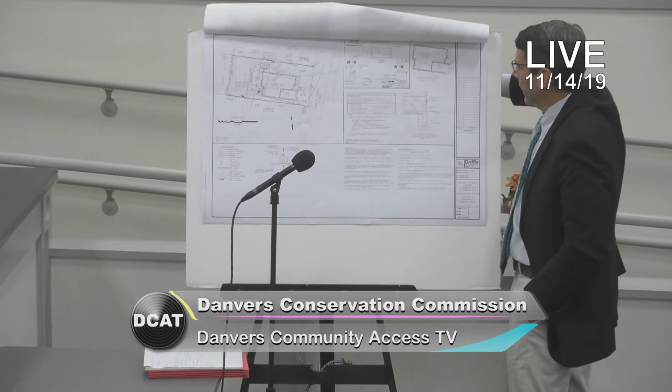So here's our plan, and I know this is kind of hard to see, but our site plan's over here and a couple of details that we'll talk about. So I just took that little site plan there and I blew it up to make it easier for us. That's good. Thank you.

So in the beige or the peach color here is the footprint of the existing house with a deck on the back, a wheelchair ramp running up the side, and then you can see there's an existing driveway in peach, and a walkway coming from the street up to the wheelchair ramp here. And there's another strip of paving along here that, if you line your car up right, you can put your wheels on the sidewalk and a little piece of driveway there, so you can get some more cars over here as well.

But what we're proposing to do is we're proposing to build a house that's just a little bit bigger in footprint. It'll be a two-story house instead of a one-story house, so it'll have more gross square footage, but the size impact on the property isn't that great. I think we're about 150 or 200 square feet larger footprint.

The house is going to have a built-in garage, so it would have a one-car garage here, right off the street level, and a little bit of driveway space in front of it as well. But then we'll have lawn sort of over here. We've got another little driveway space over here to park an additional car when we have visitors or guests. We'll obviously have parking on the street.

We're going to push the house a little further away from the lot line, so it looks like we're about half a foot off the lot line. We're going to be at 5 feet to the foundation here, and about 4 feet to the eave. And over on this side, we're going to be, looks like about 15 feet off the property line approximately on this side.

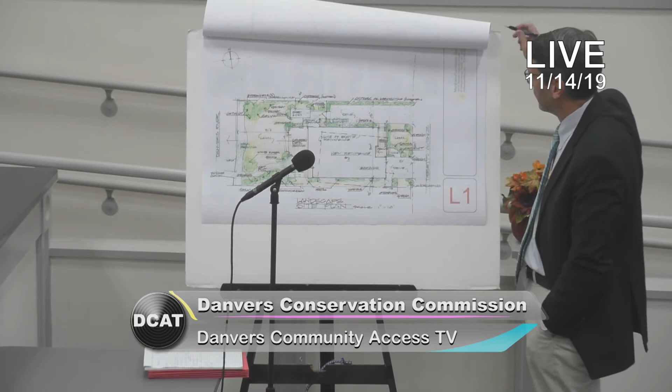They're going to obviously take what's an eyesore in the neighborhood and make it a significant improvement. So there's a lot to like on this particular project. I also want to point out some landscaping features here. Marsh Wind Landscape Design of Rowley, working with David Jacobs, the architect, came up with the plan. But you can see a lot of perennials and shrubs on the property here. There is a proposal to remove 3 trees as part of the project here. You might recall that one of our photographs shows a very dead tree there in the back at the house,

so that's... Can you turn that thing a little more, please? Sorry, yeah. Can you do that? Yeah. Thank you.

So there's the dead tree. If you look on the site plan... Why are you calling that a dead tree? You look at those trees and you look at that tree. Oh, yeah. Well, the dead limbs still fall off of it. When was the picture taken? This summer. Summertime? The others have green leaves. Oh, okay. All right. When did we meet out there, Michael? September, August? I know, if you looked at it today, you'd say, "What's the big deal?" They all look like dry trees, no leaves.

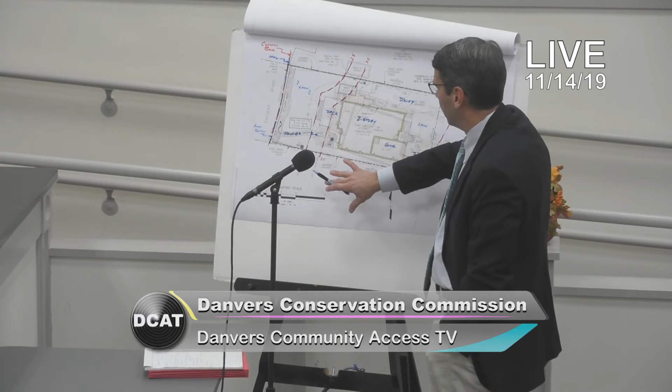Obviously, this is that particular tree. There's another tree on the sideline of the property that is also dropping limbs on both the Hubbards' property and the Marchand's property here, 13 Tivitz. Both property owners would like this tree removed because it has just gotten to be too big. It's probably near the end of its useful life. And while the building is down, we have an opportunity to get the tree out and replace it with some more appropriate landscaping. Same thing over here, we've got a tree that Mr. LeBlanc and the Hubbards would like to remove. And it's really the time to get rid of these trees.

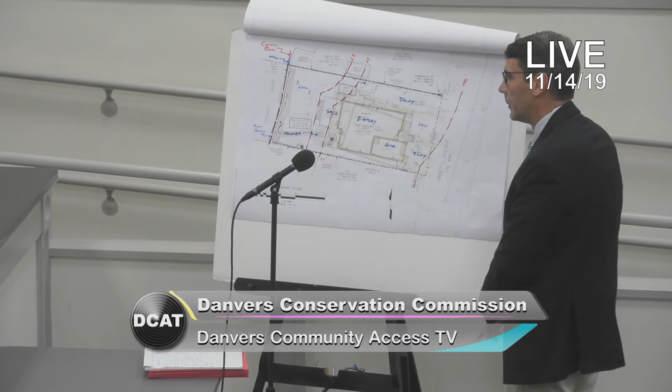Well, just to interject for a minute. Go ahead, Dave, you done? On the picture, can I see the backyard again? Of course. So it's just lawn back there, right? That's correct. And you're proposing, besides the lawn, to put in a walkway? We're going to put a walkway from the new house out along the seawall here. Along there as well? Along the seawall, right, because we don't want splash over killing the grass. But the grass is there now. Right, and obviously it's susceptible to wave action and spray, and as sea levels rise, this condition's only gonna get worse, so we're trying to protect the edge of the property.

What is the condition that's worsening? Right now, the wall is failing, so there's dirt going out into the river, there's been some settlement there. But you're gonna address that with a repair to the wall. Correct. But not in the scope of this project. We're gonna come back with another filing for the wall and a float and a small pier. And do they live in the house now? No, we live in Beverly, and the house is unoccupied. Not habitable? No? So you're gonna disturb that area along the wall twice then?

Well, assuming that we're gonna come back pretty soon with our notice of intent application for the pier, and it's gonna take 6 or 9 months to do this work, I think we'd probably get it all done in the same project. But you're gonna come back with a separate filing? That's correct. But for us, it's two separate projects.

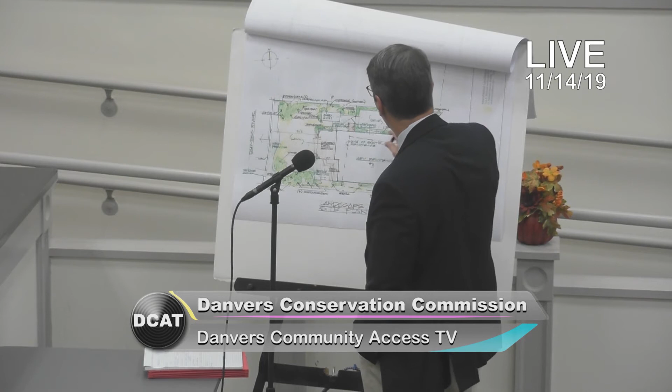It's pervious pavers, right, but I think we're trying to protect the edge of the lawn from salt spray and want to have good growth in that area. But we are proposing, as you point out, shrubs and perennials all along the property here. So we're gonna add significantly to the amount of shrubs and perennials at the property.

Are you gonna add any trees to replace the dead ones? We don't really have any proposals for trees. We do have proposals for some evergreen, sort of large shrubs, arborvitae or cypress up here. The plant palette is here. I saw that. Nothing really tall, but stuff that will flower at different times of the year and provide color throughout the season. And of course, some evergreen, particularly the Colorado spruces and evergreen shrubs as well.

How susceptible will this be to flooding as time goes on and we anticipate sea levels rising? The house will comply with the current flood requirements, which the current house doesn't. So we're going to elevate the first floor; the first floor elevation will be 11.5, and the flood zone here is 10. 11 and a half above mean high tide?

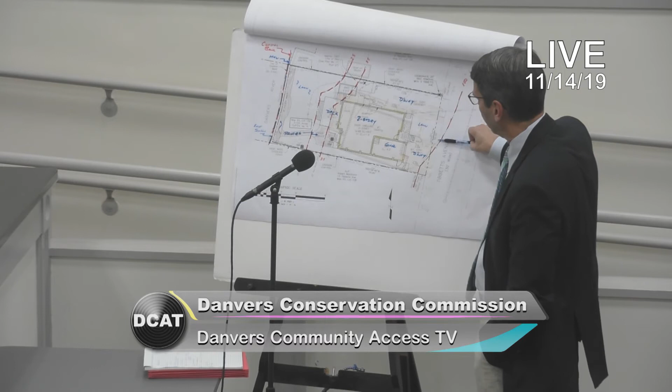So is there gonna be a foundation? There will be a foundation, there'll be a crawl space, and we'll have flood vents to allow water to come and go, to pass through. And what about the garage? Same thing, flood vents here and here. So in the event of a flood, we'd be at elevation 10, the 100-year flood elevation, which is about 1 foot above the street elevation here. There's an elevation 9 in this area here, so the water would be 1 foot deep in this particular area.

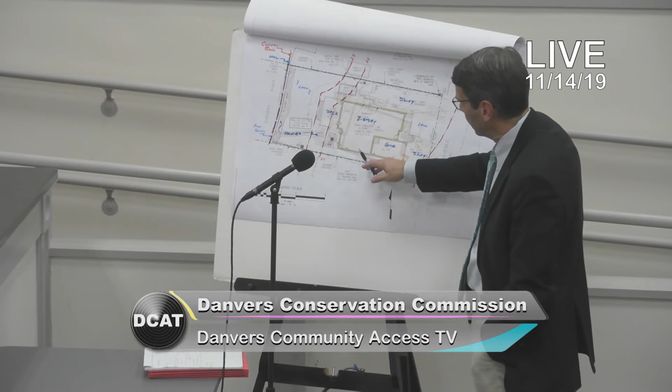But the first floor would be elevated above that, and the crawl space would have water going into it through the flood vents. Complies with flood. And there's no basement, obviously? No basement, a crawl space. Okay. So you have 3 feet plus or minus to stuff a kayak underneath your house or something like that. What is it now? There's just a crawl space underneath it, but there's no flood vents or anything like that.

Well, all in all, I think it's a good project. I'm just uneasy with the pavers, building a patio or whatever you wanna call it out to the wall, and then having to redo that when you come back to rebuild the wall and the pier. Well, I think it would be more likely that we would hold off on doing that portion of it. Yeah, that's what we're thinking. Take it off the plan. Take it off.

Okay. I also just have a little question about the deck. It says the deck's pervious, but it also says it's covered, so what's the cover? This area of the deck is covered, so there'll be a roof over it, and then it'll be open underneath. Like underneath the deck is open? Yes, right, so air can move around. So where will the runoff from the roof go? We would put it onto the lawn. Onto the lawn, yeah. Does staff have any concerns with this?

I just have 2 points. One, noting the ZBA, is there any chance that this plan could change based on the ZBA's decision next week? I can't predict what the ZBA is gonna do. I think we have a good project, but you're right, I don't know. What's the relief you're looking for at the ZBA? Does it have to do with side lot lines? Setbacks. Yeah, because you're in an R2, so what's the side lot?

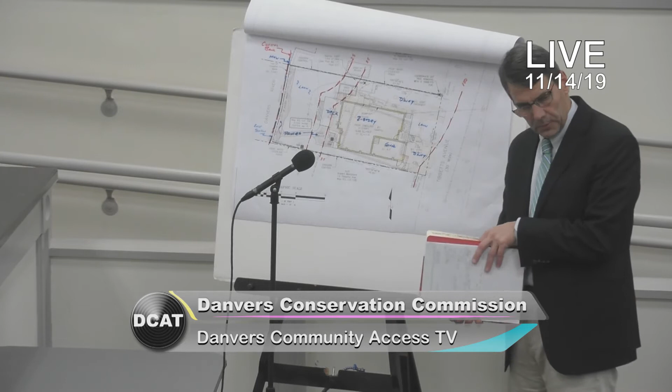Side lot requirements in the R2? 15. 15, and how close are you? We're gonna be about 5 here. You're gonna be 5? Right now we're at 0.5, so it's a finding. Is it technically a finding? They're looking for a variance, right? Right.

But we're going from a half a foot to 5 feet. Right, so you're becoming less non-conforming, and that's good. That's what I'm saying, that's a finding, I think. We're pushing it back from the street. Right now, I think we're at 13 feet from the street, we're gonna go back to 16. What's the front setback? 20? I think it's a 20 or 22. So we're gonna be 15 feet off of the street line and 20 feet off of the pavement itself.

How many square feet is the house? So the footprint, 2,200? Living space, so it's 2 floors. 1,100 square foot footprint? Yeah, approximately. Just to get the numbers right, the proposed front yard setback on Tivitz is 16 feet, which is greater than the existing front yard setback of 13.3. The proposed side yard setback will be approximately 5 feet to the foundation, which is greater than the existing side yard setback of 0.4 feet to the road. So it's an improvement. So you're going from a half a foot to 5 feet?

Yeah. So that's not our decision to make. Interesting. Do we need to wait for the zoning board of appeals before we make a decision? Only if it changes, then they'll have to come back and reconcile the plans. Well, sometimes we say, go get your other relief and come back here, but I think it's situational. We're keeping this open to the next meeting, so you get your relief. That way, the two plans will be the same.

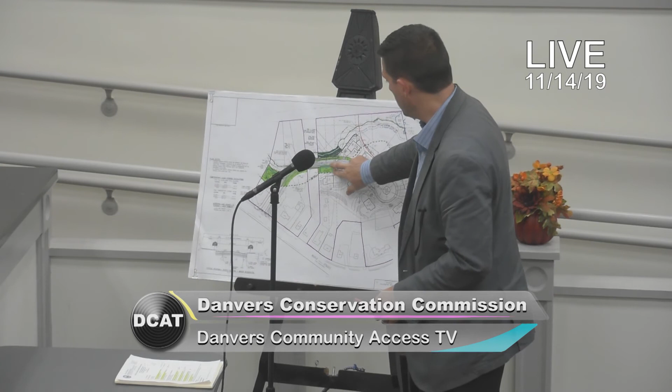Evening, Mr. Chair, Scott Cameron with Moore Cameron Group, here on behalf of Beaver Brook Woods LLC. We are requesting a continuance for the two lots, 6 and 7. We are working with planning staff and the planning board on the existing right-of-way that passes through this area, and we have not been able to reach a conclusion on that yet. Just timing, quorum, just a lot going on. So we would really like to have that resolved before we proceed forward with these two applications.

Mike, question? Yes. So with regards to, what have we approved actually so far here? The roadway. Yeah, but now the roadway could change? No, the roadway's not going to change. What's going to change is whether there's an easement over here, or whether the town wants to relocate it here. But it's not gonna affect the roadway? Roadway does not change. All right, that was my question.

Okay, so the applicant has requested that we continue, is that correct? Yes. Do you have a date for that, Scott? Do you want to continue to the 12th or next? Yeah, the next meeting, which is December 12th. Okay, so that's just clarified. Right. Okay, Mike, or Chelsea, you just want to make a motion?

Yeah, I'll make a motion to continue 305R Maple Street, Lot 6, DEP file number 14-1332, and 303 to 309, 305R, 313R Maple Street, Lot 7, DEP file number 14-1333, to our next meeting on December 12th. Motion's been made, is there a second? I'll second. All in favor?

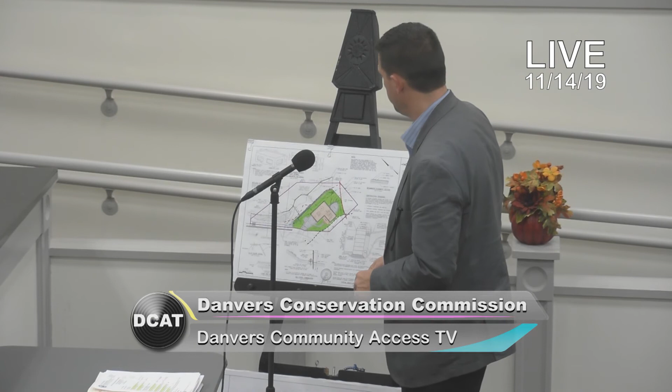How long is the retaining wall? Just show me that again. On what's that, the north? For the roadway? No, the one in the back of the property. You said the short one. Right. It's right on the 35-foot line? It's outside of the no disturb. So it's outside the 25-foot, it's just inside the 35, so we didn't go into that no disturb.

We're using that as the limit of work on the 25. What'd you say, Georgia? I'm just wondering how far it is from the 25. Is it 25.2? I don't have an exact measurement. It'd just be good to know, listed 25 feet on it. Okay. So the idea would be to stake the erosion control along that line.

Has this plan been modified since we discussed the road and the wetlands replenishment? The replication, no, we haven't adjusted this, because that had to do with the road, and so we'll have that replication plan along with the road. As I'm looking, that would change the border lines on the buffer zones, wouldn't it? If the replication was being added over here, and I don't know, we haven't done that yet, because we're not there yet in the project. Where's the replication? The replication area is over here. So it's this area right here.

Okay, and what's the distance from that to the retaining wall? It's about 20 feet there on that design. So then your retaining wall is within the 25-foot? Within the replicated wetland? That's the replicated piece, that's not the existing 25-foot. But that's going to happen, isn't it? Isn't the replicated? Well, if this is where it ends up. We haven't done that design yet, because that was one of the conditions from the roadway.